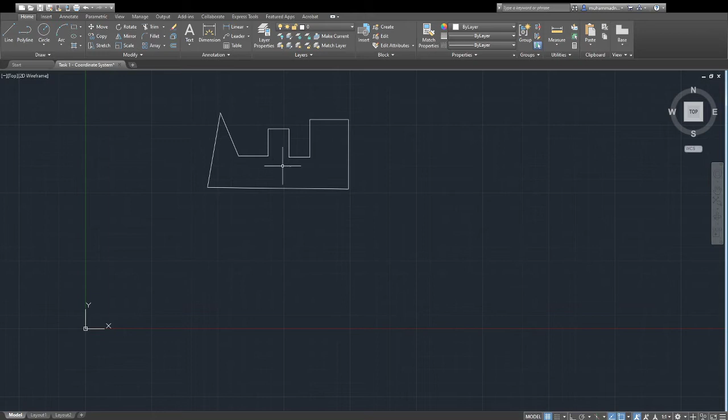Okay, untuk command close, dia hanya boleh digunakan bila objek itu adalah complete object, iaitu objek yang menggunakan polyline. Contoh kita buat objek menggunakan polyline, dan kita nak closekan objek ni, kita boleh buat command yang mudah, iaitu command C.

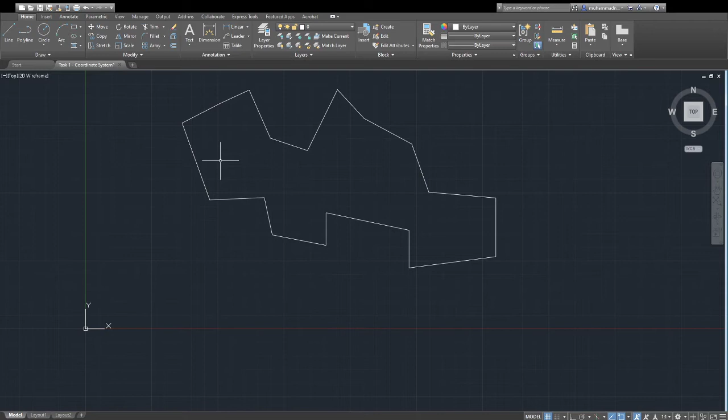Dia akan close. Tapi jika objek itu adalah objek yang tidak bersambung menggunakan polyline, contoh satu line disambungkan dengan satu line lagi dan satu line lagi, sekarang contoh kita nak closekan objek ni, type command C, dia tak akan boleh close, sebab objek itu adalah objek yang tidak bersambung. Itu jelas kan? Kita untuk menggunakan command C, pastikan objek itu adalah objek yang bersambung. Itu yang pertama.

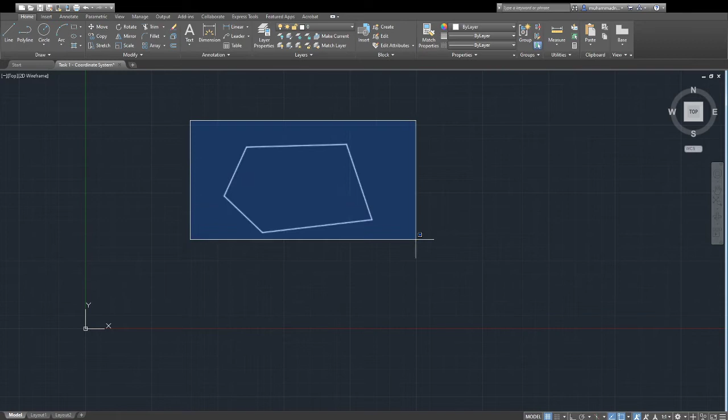Okay, seterusnya untuk task kita, task yang saya telah bagi tu, kita tengok balik soalannya. So right into the question. Soalan yang telah saya bagi tu, ini adalah rajahnya, bentuknya, you guys perlu completekan.

Okay, jika kita tengok dekat sini, line ada berapa value atau data yang telah saya beri. So to complete this task, first thing you guys boleh buat adalah tentukan dulu point setiap line ni, iaitu dengan identify each point.

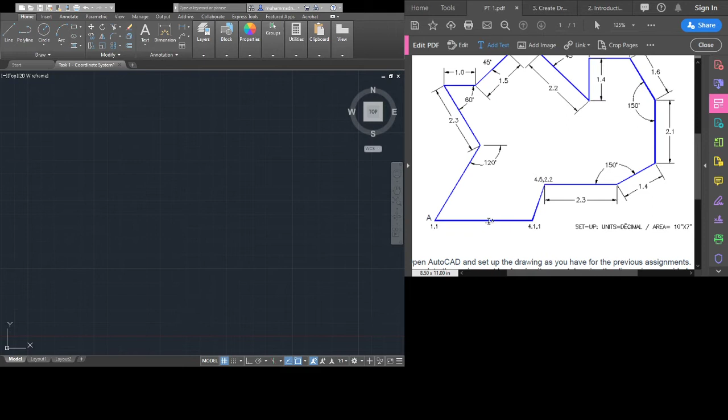Pertama you buat adalah point A. Tentukan, ini adalah point A. Dan seterusnya point B dan point C. Adalah point F, G, H, I, J, K, L, M, N.

Okay, right. So once you have identified each point, dia akan memudahkan juga untuk tentukan command. Contoh command untuk A, B apa command dia, dan seterusnya command untuk C, D apa command dia.

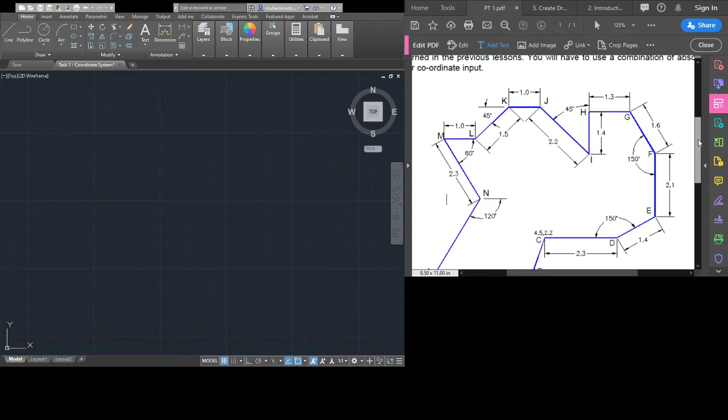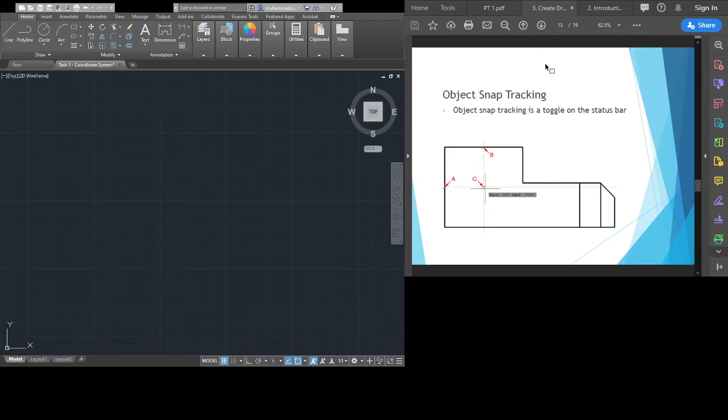Okay, so now again, just to refresh back, we have three types of coordinate system, which is absolute coordinate. So what does it mean by absolute coordinate is that it uses the function of x and y. X is for the horizontal axis and y is for the vertical axis. So the main reference point is 0,0.

But for relative coordinate, it refers to the previous coordinate. So for relative coordinate, you need to use the symbol @, for the length of the line that you would like to use.

And while for the third coordinate system is polar. So polar basically involved in terms of length and angle. And for angle, need to remember it will always start with the counterclockwise, so it will give you a positive value.

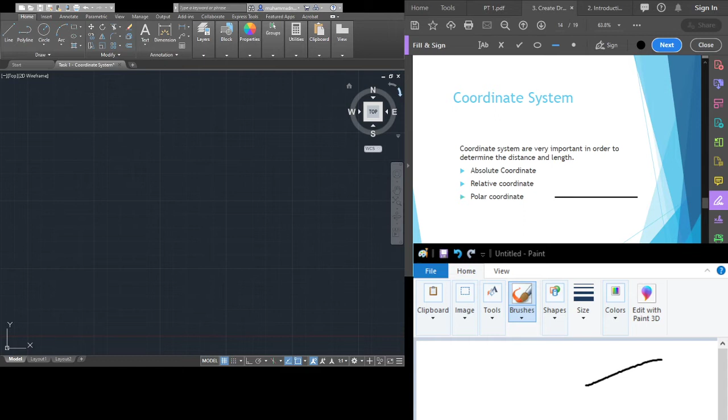So you need to remember at least the main angles, which is 0 degrees, 90 degrees, 180 degrees, and 270 degrees.

So any angle in the anti-clockwise direction will give you a positive value. For clockwise values, it will give you a negative value.

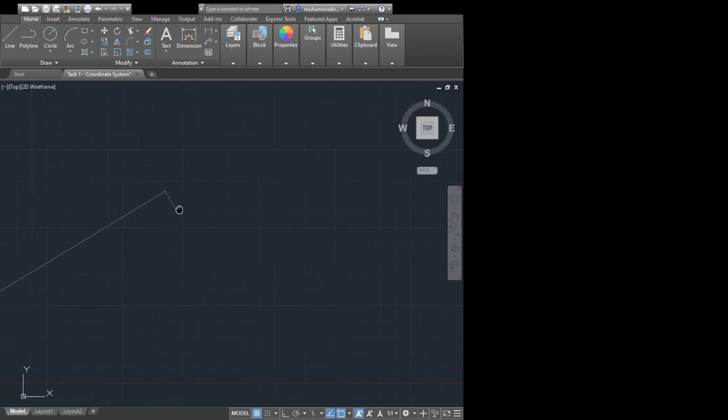Meaning that for point A to point B, to do this task we first type in 'line'. So the first coordinate is 1,1. Then we will give the first reference point.

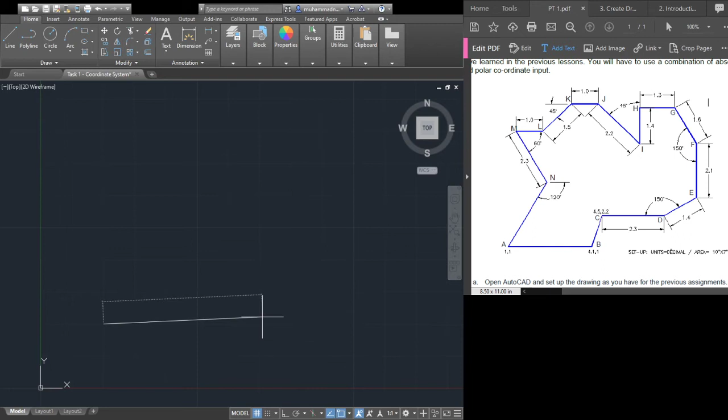Next point is B. From point A to point B, it stated that the coordinate for point B is 4.1, 1, meaning that the x value is 4.1 and the y value is 1. So you can do this by simply typing in the coordinate 4.1, 1. It will give you the point of B.

Next, for line BC, the coordinate for C that has been provided is 4.5, 2.2, meaning that we can simply just type in 4.5, 2.2. These are absolute coordinates.

Next, for line CD, it does not give you any coordinate for D, but it gives you the value for the length of line CD, which is 2.3. There are no angles here.

So we need to use the relative coordinate system, meaning that for the length we need to use the @ input, and then we enter the length of the line, 2.3. It is a straight line, so there is no angle, meaning 0 degrees.

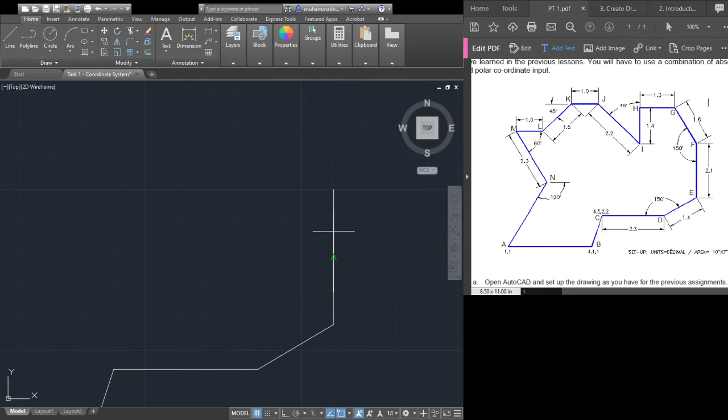So here we can use the first starting point here, which takes up to here. So the starting point is 270, meaning we need to calculate 270 minus 150, and we will get 120.

Next, GH - the line will now go up to the left side. For any values to the left or to the bottom, you need to show a negative value. So in this case, @ negative 1.3, and the angle is 0.

Next, for line HI, the line will move downwards. Downward movement gives a negative value, meaning @ negative 1.4. Then for the angle, it is 90 degrees but minus, so it's minus 90 degrees.

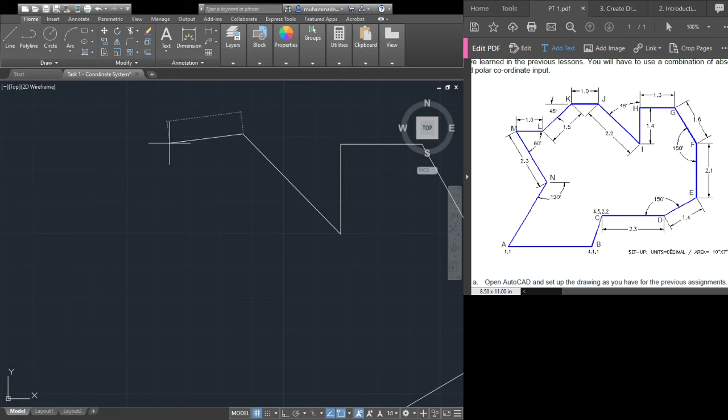Next, for line JK, the length is 1. We went to the left, so we need the negative value, -1. So the angle is 0.

Now next, KL. For line KL, the length is 1.5, and the angle is - what is the angle? Use the nearest reference point, which is 180.

We'll go to 45 here, so 180 minus negative 45, because it went downwards in a clockwise motion. That's why we need to use negative 45. So we will get 180 plus 45, which gives us the value of 225.

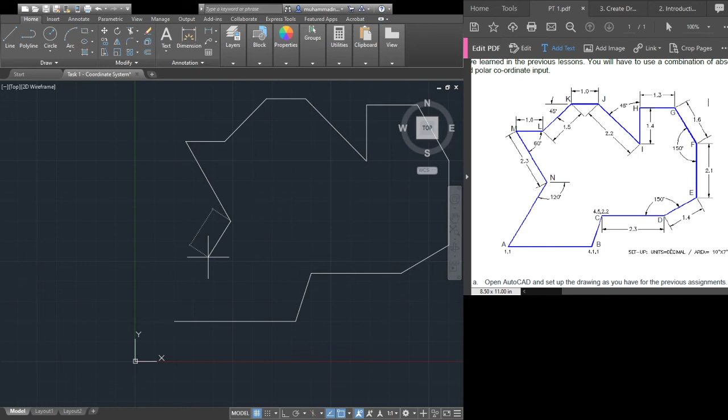For example here, we use the reference point, which is 1,1. So if we close the object, or we can use the close command. Okay, so we have completed the drawing.

Okay, now for the dimension, for the basic dimension. So for the basic dimension command, we can type in DI. Okay, so first we need to set our dimension setting, which is the dim style option.

So select this and go to modify. Go to modify. Okay, and then here you can change your dimension setting, either the colors of the line, the colors of the arrows. So you can make changes. Then the colors of your text. Make changes. So the main important thing is for you to ensure that

your units are correct. So in this case we use 2 decimal points. So this is the most important thing that you need to set, which is the primary unit, to select your correct primary unit.

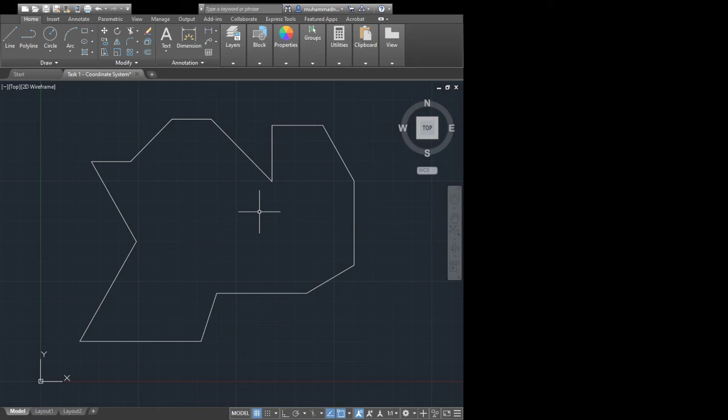So to take out your dimension, just type in DI. Okay, so let's look into the first dimension that we need to do. So first we need to make this dimension CD.

So first we can type in our reference point. We can click here on the text item, we can type in our reference point.

So to repeat the command, you can just click Control C first to copy the text, then to paste the text again, just Control V.

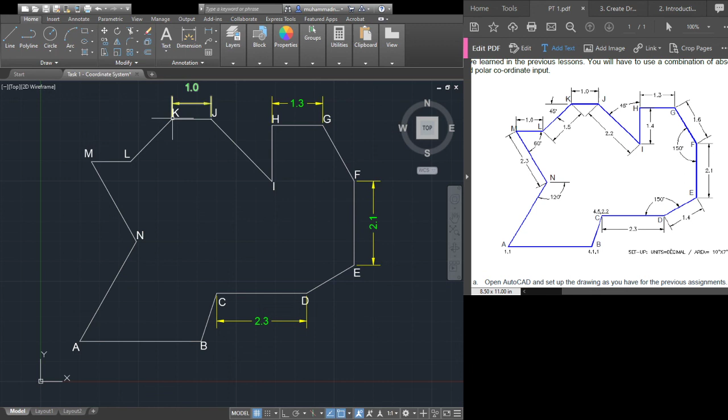Okay, the next command is for a line that is at an angle. So the command is dim align. So these are lines that have an angle.

Okay, so next is for the dimension for angle. So for dimension angle, you need to select dim angular. So select the angle that you want to get the dimension.

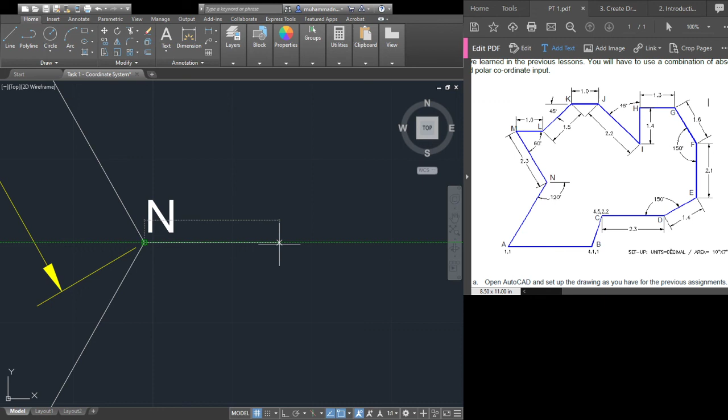And you can make your dimension for the angle here until here. So 120.

Right, so that's it for task 1. So basically this is how to complete task 1. So for task 2 and 3, basically use the same concept on how to complete this coordinate system. So hopefully you can understand this tutorial and complete the remaining tutorial.